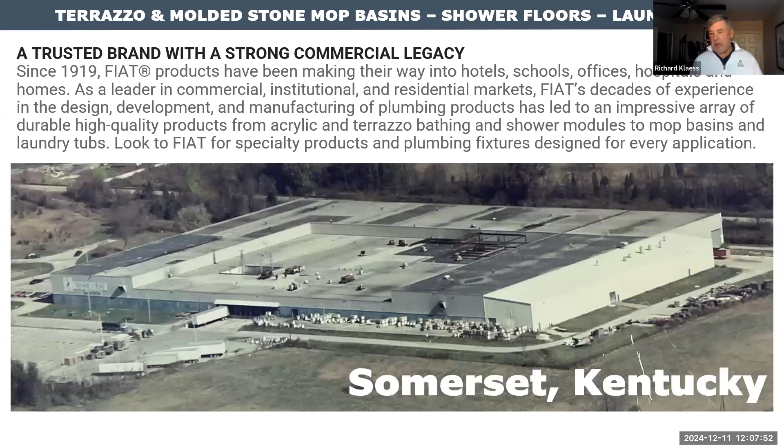Again, FIAT's been in business since 1919. We've made our molded stone product and our terrazzo, and again, being under different ownership, but now being under the auspices of GWBD, we see tremendous potential for the company and growth as time goes on.

The product categories have pretty much remained the same. We make shower floors in what we call molded stone, in terrazzo and in fiberglass. We have a full lineup of laundry tubs that may have more of a residential application, but we're seeing more of a commercial application as well. The dog wash station and our mop basins are also made in molded stone and terrazzo.

You'll hear over time we call our shower floors or mop basins molded stone, but really it's an SMC material. Why is SMC called molded stone? Well, really it's a play on words. FIAT came out with a new resin-filled product in the late 70s, early 80s to take the place of terrazzo. So really it's just a play on words. But what it is, is SMC material, sheet molding compound. Sheet molding compound is basically calcium-based resins that are wetted together and then combined with long strands of fiberglass.

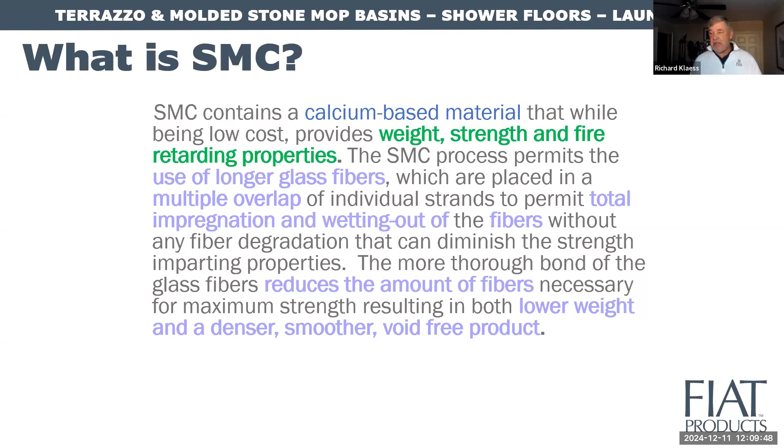FIAT has been making and using SMC material since the early 90s on all of our product. FIAT used to use BMC material. BMC is called bulk molding compound, and that was more of a nylon-filled product with the resins. By going to the fiberglass, we were able to make a lighter product using less material, but the fiberglass strands created a much stronger material. In fact, when we converted from BMC to SMC, our defect rate went from 7% to 0.5%. So it was a tremendous improvement in the product category when we went to the SMC.

The SMC material is used in different practices. It's used by the automotive industry. Some of the non-metal parts on a car are actually SMC material. They're used in frames for tanks. The turrets of the tanks use SMC frames before they put the metal finishes on top. And for those of you who played a lot of basketball outside, those Huffy backboards are all made of SMC material. So there's a lot of use for that material.

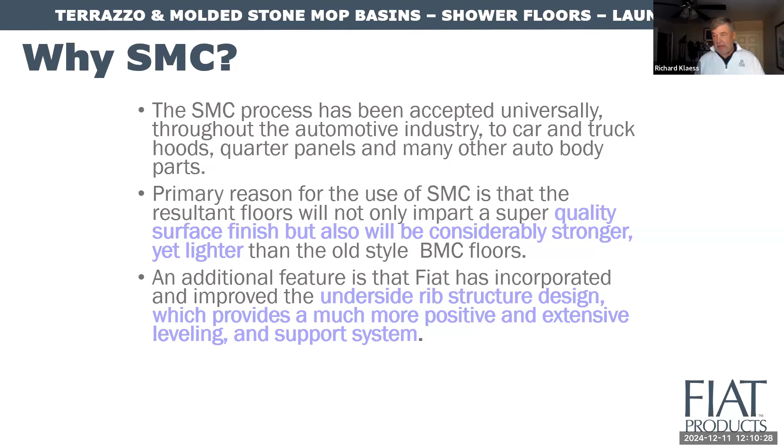And then all the product is inspected, assembled, and packed at our plant in Somerset, Kentucky.

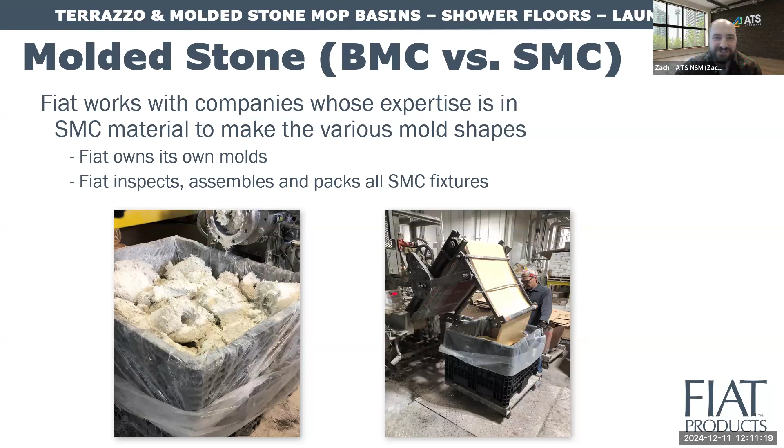Want to go into the shower floor business, the shower floor product line. A couple of the features of the FIAT shower floors: we have a 1-inch tiling flange used throughout the shower floors. All of our shower floors have an integral drain, which is actually molded into the floor itself. So it is all part of the floor.

It actually diminishes the potential for any leaking that you used to have with drains that were field installed or swedged in at the plant. We've added extra ribbing to the bottom of the floors, and I'll go into that in a little bit. We have a drain lip that prevents any leaking of water at the threshold. The water is actually transferred into the finished floor itself, as opposed to going out onto the tile floor outside. And we also have a slip resistance that, in my opinion, is the best slip resistance in the industry.

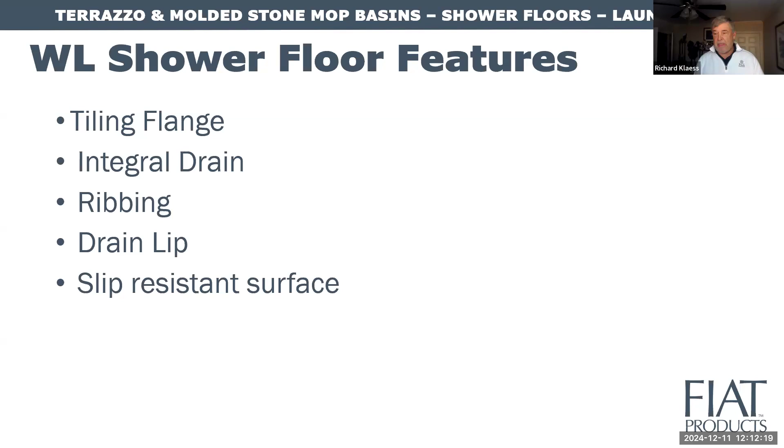Our shower floors meet IAPMO code, CSA, and for those of you in New England, we are all Mass code approved as well. Basically, when it comes to the product category itself, these are the codes that we need to meet when used in its application.

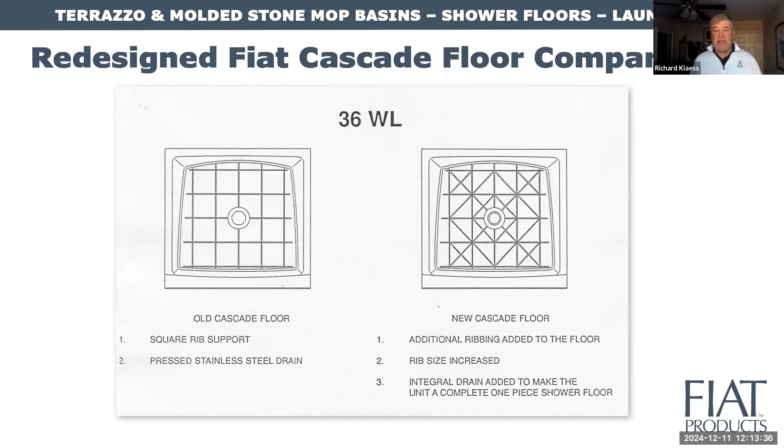In fact, when you're using our WL shower floors, our SMC floors, you do not need to set it in a bed of mortar. It can actually sit on a finished floor or a subfloor. Some installers like to use felt paper, felt padding, maybe to decrease some of the rubbing that may be on there, but you do not need to set our floors in any type of mortar.

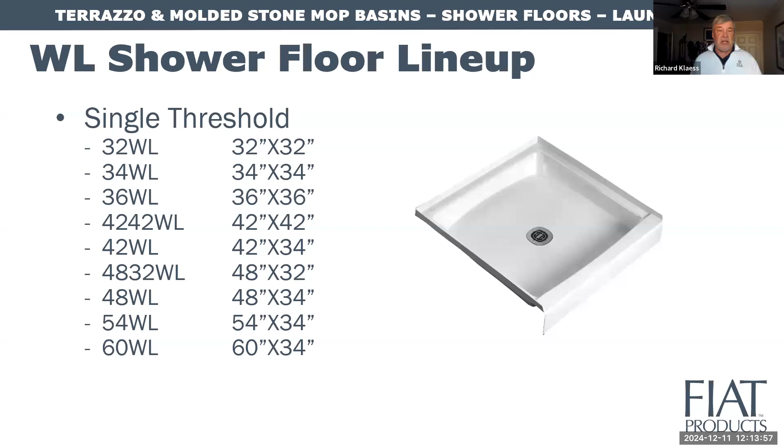The floors come in many sizes, and we can provide this to you later on, but anything from a 32 by 32 to a 60 by 34. And we are seeing more and more of these shower floors being used in hospitality applications. More and more hotels are going to an SMC floor instead of using a traditional bathtub, so we are seeing an uptick in business at the hospitality end. We also offer these in double threshold and neo-angle sizes.

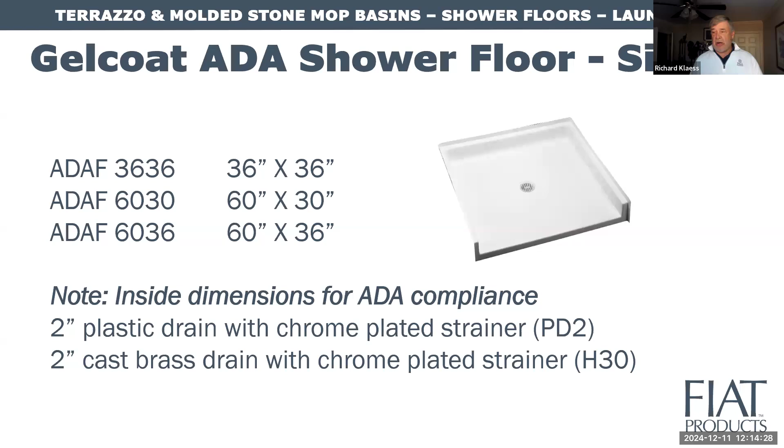And that pretty much covers the SMC side, but FIAT also offers a gel coat ADA shower floor in 3 different sizes. They are a gel coat fiber with a fiberglass reinforcement. We do use a 2-inch plastic drain, or we can provide a cast brass drain. These floors are set up where they will sit next to a finished floor, so you have a clear or seamless wheelchair transfer from the finished floor to the shower floor. So FIAT does offer these 3 sizes in a gel coat. It is not SMC, but it is a fairly popular item in some lower end ADA applications.

Just a quick view. Again, this is just a drawing that shows how it's installed, and it sits next to a finished floor, so you have a seamless transfer.

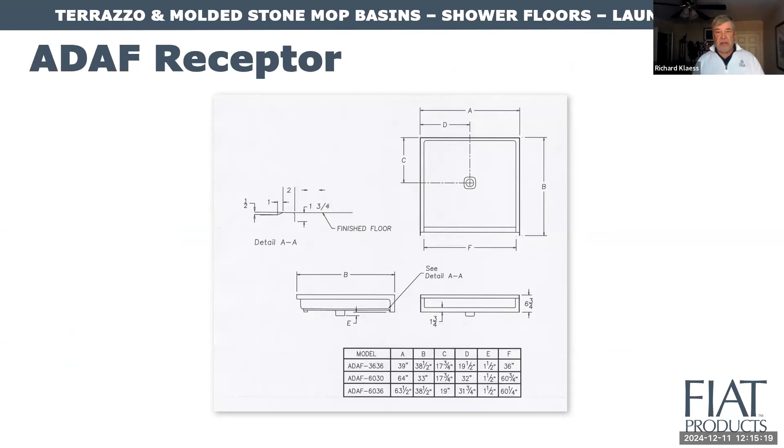So when you look at the FIAT shower floor lineup, we offer it in molded stone, fiberglass, and terrazzo. And we'll get into the terrazzo portion of it shortly.

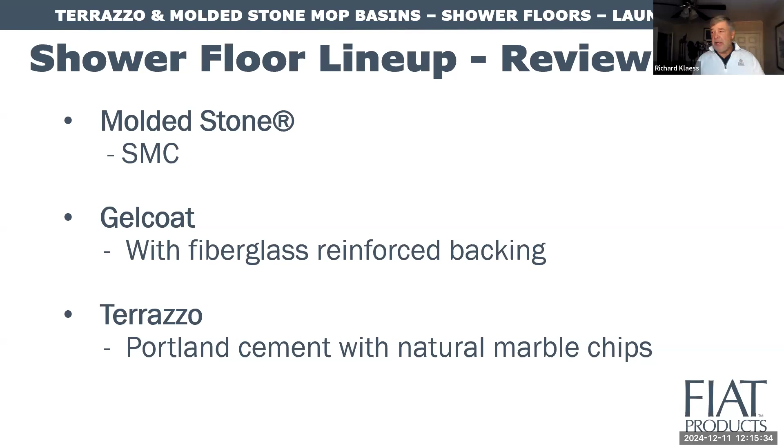Leaving shower floors and going into laundry tubs, FIAT has a complete lineup of laundry tubs using 3 different materials, offering it in single bowl, double bowl, and a drop-in option. Again, we are seeing more and more of these being used. Multifamily, they're putting it in laundry rooms. We're seeing it in small commercial applications, garages, commercial garages, they're using laundry tubs.

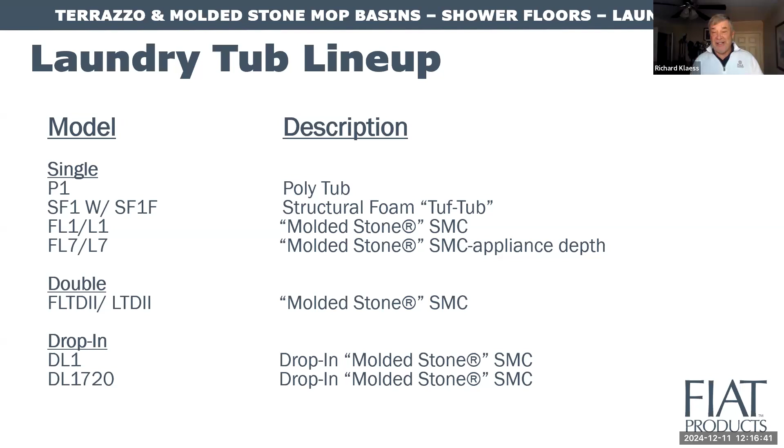So FIAT offers a good, better, best when it comes to laundry tubs. This is our lower end poly tub. It is offered in a single bowl, floor mounted only. It's what we call appliance depth, it's 20 by 24. All that means is it has the same depth as a traditional washer and dryer, so when you put that laundry tub next to the washer and dryer, you have a seamless line across. They come with white metal legs.

And we use the term SAS every once in a while. That's an old FIAT term, it's called Serve a Sink. It was just an acronym we used to talk about our laundry tubs, so they were Serve a Sink laundry tubs. So we still use that acronym every so often.

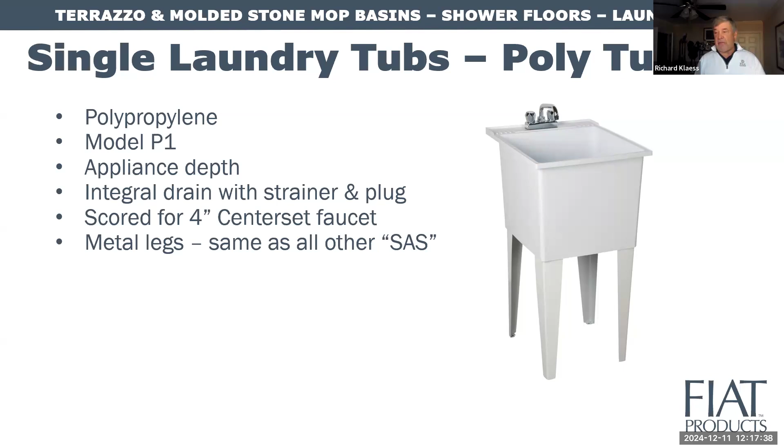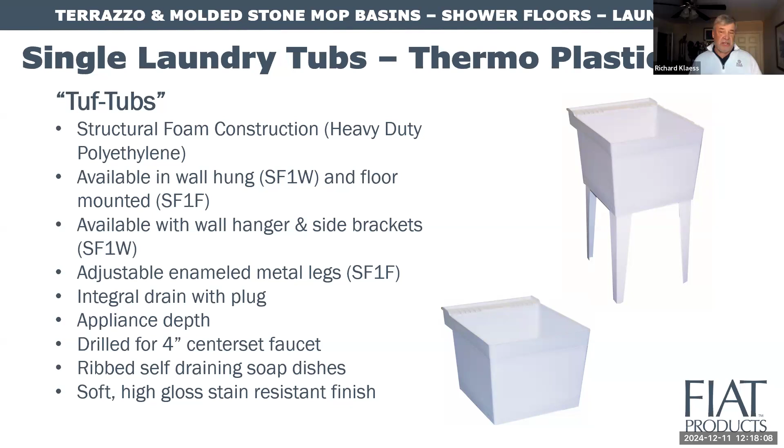Our when you talk about good, better, best, this is our better. This is our structural foam, a heavier duty poly that's offered in both floor mounted and wall mounted units. Again, white metal legs. All of our laundry tubs are semi-drilled underneath the soap ledge. That allows the plumber to offer either 4-inch or 8-inch center sets in some applications. So it's semi-punched underneath, and the plumber can just drill the hole for whatever application they need. Again, this unit is 20 by 24, and it is appliance depth as well.

And this is our bread and butter unit, our FL1. Fiat's been selling this model for over 40 years. This is a little different. It's 23 by 21, and it actually comes with a separate drain and plug. But again, this was what we created 40 years ago.

It is an SMC material. So our good is poly, our better is structural foam, and our best is SMC. We offer 2 different types of laundry tubs in SMC. This unit here, our FL1, also comes with metal legs. All of our leg kits come with levelers, because we know that not every application has a level floor. So the levelers even out the legs, so you don't get a wobbly laundry tub going forward.

The other SMC laundry tub we have is a 24 by 20. Again, it's offered floor mounted and wall hung. This unit does come with an integral drain. It does have metal legs with the levelers and can be drilled for 4-inch or 8-inch center sets. So we literally, in our best category, offer 2 different sizes in the SMC material.

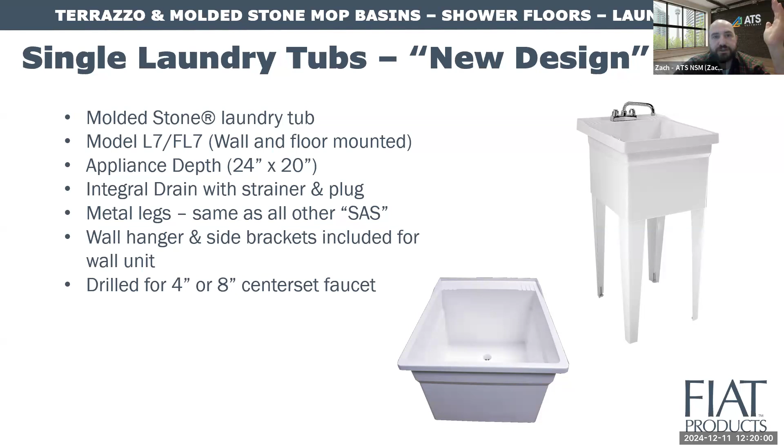I'm sure this has come up for you guys, maybe more in the mop sink section. But we've had a lot more requests lately for the odd wall-mounted utility sink or mop sink. Would this best design be acceptable with the wall mount? It's very similar material, is it not? Yes, this is the same material as our mop basins.

The laundry tub itself in our better and best categories is offered in wall mounted. Basically, it's the same laundry tub, but it comes with different kits. It comes with a floor mounting kit or a wall kit. The wall kit includes the brackets and spacers, so it covers the gap between the laundry tub and the finished wall. So you have a clean finish from top to bottom between the tub and the wall itself. There's no gap in between.

We offer our double laundry tub the same way. It's appliance depth. It can be offered in both floor mounted and wall hung. We also have a drain assembly, so it connects both bowls within the laundry tub to each other. Obviously, it doesn't come with a separate connection to the P-trap, but the drain itself is included to connect both bowls.

Just as a side note, Fiat does offer all their single laundry tubs in what we call a to-go, which includes a faucet, a P-trap, and connectors to the faucet. So if there's ever an application where you just want a laundry tub to go, we do offer that as well.

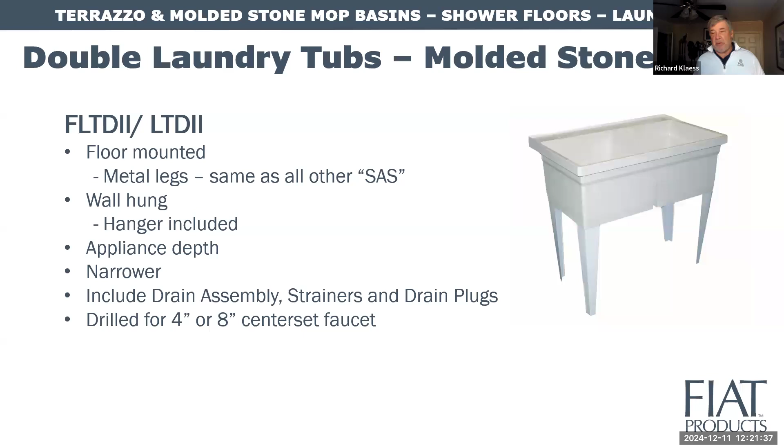And then we have 2 separate types of laundry tubs. We have a standard drop-in of 24 by 22 and what we call a hobby sink at 17 by 20. They are both offered in SMC material. We're seeing in some cases in multifamily where they have a laundry room with a set of cabinets with a counter, and they put the drop-in laundry tub in that counter area.

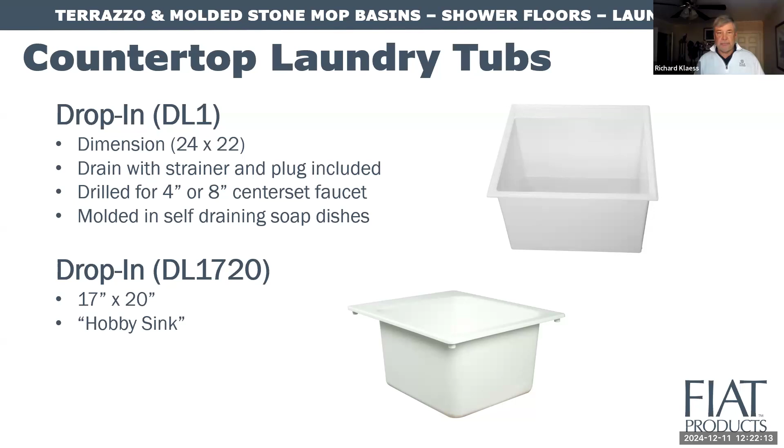And again, laundry tubs meet the standard IAPMO, CSA, and Mass Code approval codes.

As Zach mentioned earlier, we have our Pooch and Boots scrub tub, our pet wash station, and I know we had a presentation on this before, but just a little side note, as I'm spending more time out in the field, I'm hearing more and more how specifications for multifamily are including these in the application. In a lot of cases, what we see is a standard engineering spec calling for WC1 for the toilet or L1 for the lav. At the bottom of the spec, it calls for a dog wash station, and the architect or designer is literally leaving it up to the imagination of the installer to create one of these.

So we took really the best of several of our companies to create this dog wash station. The picture on the right is our current dog wash station, but I actually found this in our archives—this is a picture from 1972 where Fiat was actually trying to promote our mop basins as a dog wash station. And yeah, I'm old, but that is not me in the picture. That's fantastic, I love that.

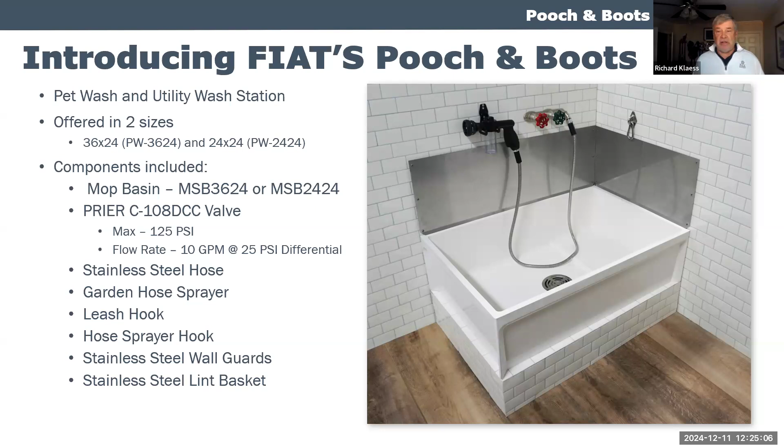We offer this in 2 different sizes, 36 by 24 and 24 by 24. We also offer it less valve because in some cases they want a different looking valve, maybe a pressure balance valve in matte black or a sprayer in polished nickel. That's not our game, we would leave it to you to find someone else to provide that. But I would say 90% of the application is going to be using our PRIER C-108 valve.

And again, just another picture showing a smaller unit.

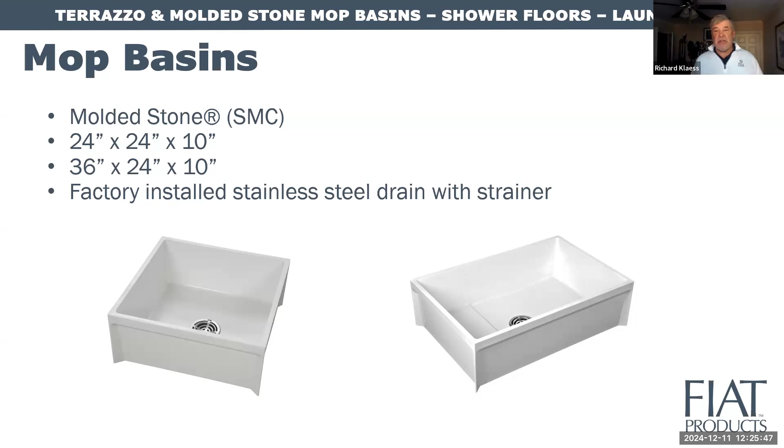Mop basins are, from an engineering and commercial standpoint, the real core product line for FIAT. FIAT's mop basins, we offer 2 different sizes with a stainless steel drain, 24 by 24 and 36 by 24. The factory installed stainless steel drain is actually swedged in at the factory, so there's no installation concerns in the field.

We also offer a unit with an integral drain. It's actually molded into the mop basin itself, so there's no worry about installation. It does come with the gasket and the strainer plate. One of the things I wanted to cover here today is where's the best time to use either the mop basin with the integral drain or the mop basin with the stainless drain.

FIAT came out with the integral drain about 20 years ago, and it's probably now 90% of our business. It's a lighter unit using SMC, and it can be used for most commercial applications. Where we still see the stainless steel drain is in some of the bigger cities. I lived in Chicago and worked there for 25 years, and they still use lead and oakum in the city. So lead and oakum is pretty much what you want to use with a stainless steel drain.

I took someone through a wholesaler's warehouse and they saw a whole pallet of lead ingots and asked what's that? I said, this is what they use. Some other cities, New York, Philadelphia, San Francisco, in some applications still use it, still would like the heavy drain or the stainless drain. So we offer both. It's all a matter of application, but 90% of our business has gone to the integral drain.

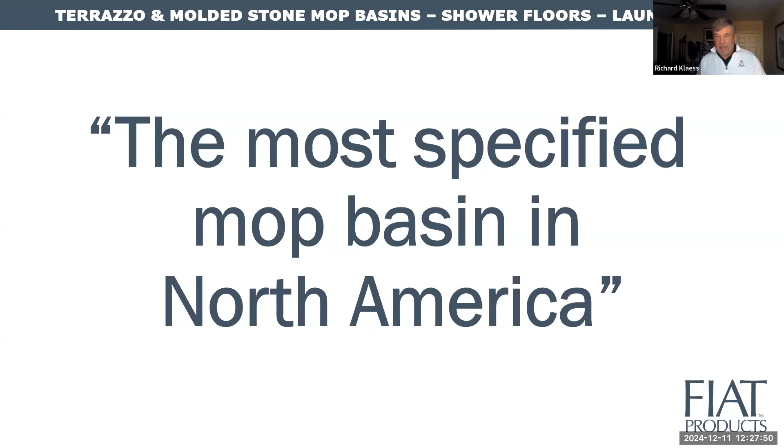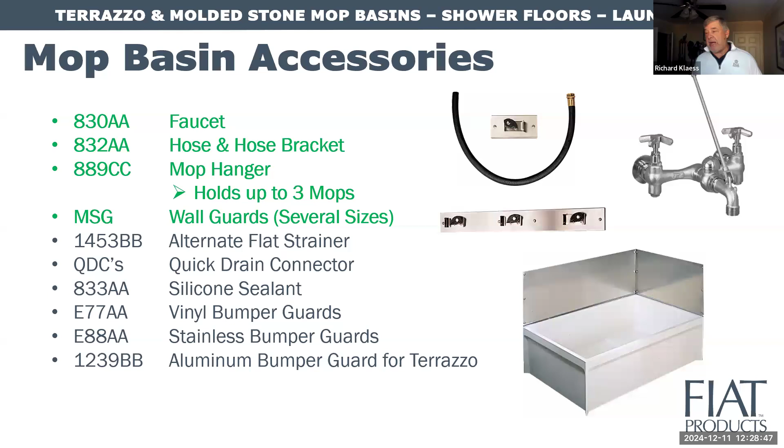The wall guards, I would say maybe 75% of specifications call for wall guards, but I still, when I talk to our sales teams, make sure that they include it as part of the everyday spec. We also offer a lot of other accessories, but between the mop basin and these four items, these are parts of the primary specification to look at.

Now, this is where I'm going to have a question. It comes up a lot internally, actually. We're often asked to put together a product selection, and we may just have an application, either a school or hospitality, office, for the bumper guards. Where should you use a vinyl bumper guard versus stainless? What are the benefits? Is there a true differentiation, or doesn't it need a bumper guard, or is that too much of an upsell? It depends if you've got a heavier application.

Bumper guards are always good to add. They're not always necessary, but they do add added protection to the sides of the mop basin. Vinyl versus stainless steel, there really isn't much of a difference. I guess it has to do with the building itself, how heavy-handed are the people using that mop room, are they just slamming buckets? In some cases now, a lot of companies are using plastic or composite mop buckets, so they're really not going to cause any damage to the side of the mop basin itself. It's really just added protection.

Hopefully that answers the question, Zach. Yeah, perfect. Thank you.

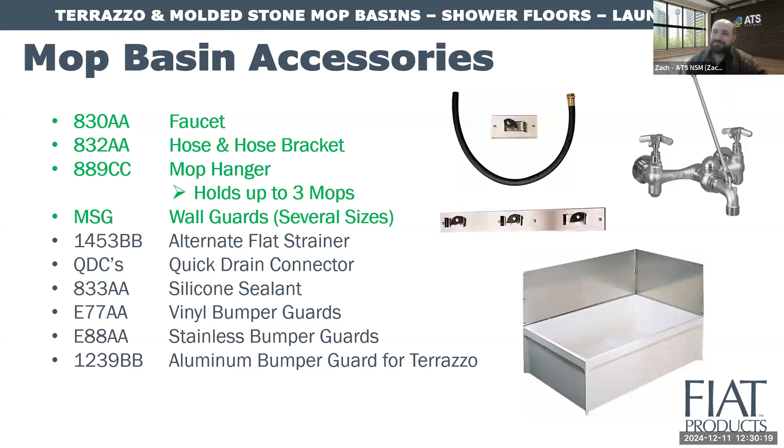Again, our mop basins meet all the required codes: IAPMO, ANSI, ASSME, CSA, and Mass Code.

One thing I heard going back to the dog wash station: at the ASPE convention this year, a lot of engineers were talking about having it in their multifamily specs, but now a lot of engineers are doing pet stores or pet hospitals and adding these pet wash stations to their specifications when building them. So there is a huge market we are just tapping into with the dog wash station.

Then there's terrazzo. Terrazzo is still and continues to be a very important part of our lineup. It's kind of funny - I've been in this business quite some time, and every year somebody says terrazzo is a dying business, and every year our terrazzo business increases.

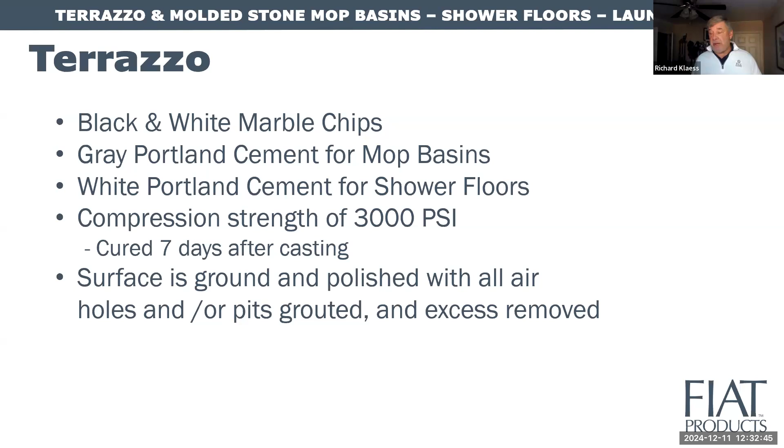The surface is then ground and polished, with air holes and pits grouted, and all excess cement removed. The terrazzo has a smooth surface of about 70% marble and about 30% Portland cement.

For sealing, we recommend that our terrazzo product be sealed at the job site. There's some contention as to whether terrazzo should be sealed at the plant or at the job site. We feel it should be done at the job site towards the end of the job, mainly because if it's sealed prior to going to the job, you get a lot of contamination and construction dirt in that sealant, and it needs to be stripped and resealed again. So we ask, and we even have it in our instructions, that you wait until the product is installed, towards the end of the job, and then seal it.

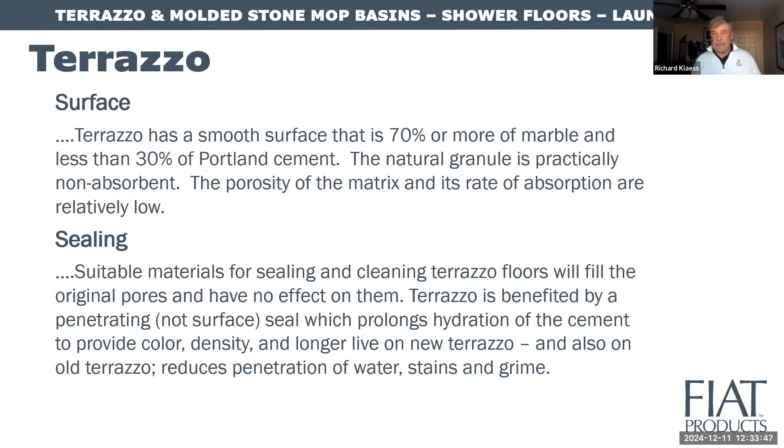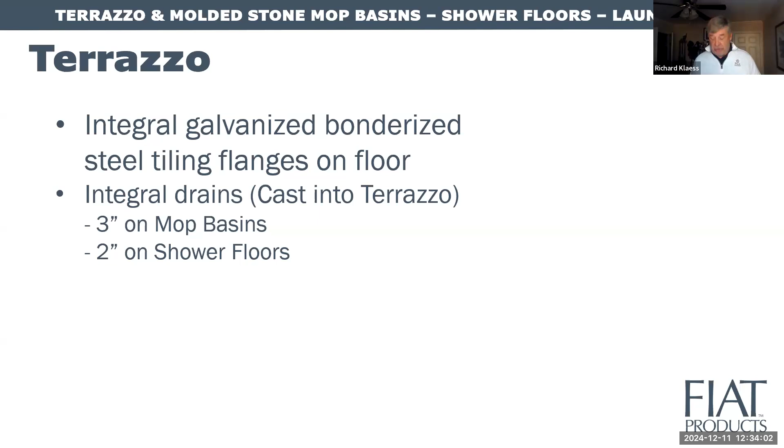Our terrazzo comes with integral tiling flanges - actually this needs to be changed, they all come now with stainless steel tiling flanges - and we have integral drains cast into the terrazzo, 3-inch on mop basins, 2-inch on shower floors. Again, they meet all appropriate codes.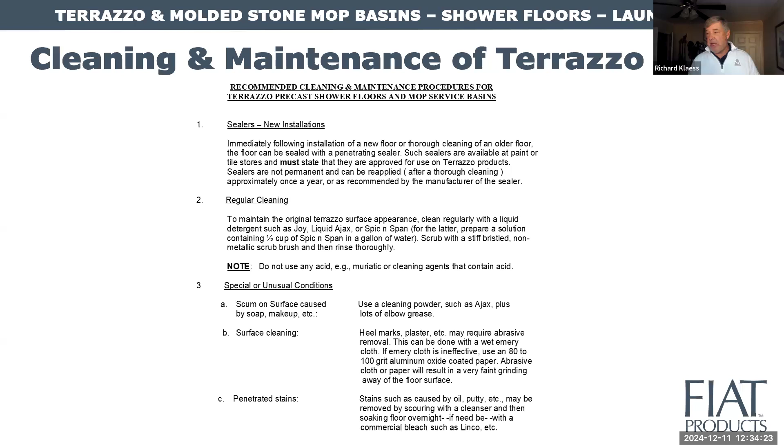We don't need to get into this too much, but we do include installation instructions and talk about sealing. We also include how to clean and maintain all terrazzo, and again we talk about sealing.

Then there's the terrazzo lineup. There are many, many different sizes of terrazzo. Some people ask why we have so many different sizes of terrazzo versus not as many sizes in molded stone or SMC. An SMC mold can cost anywhere between $250,000 and $300,000.

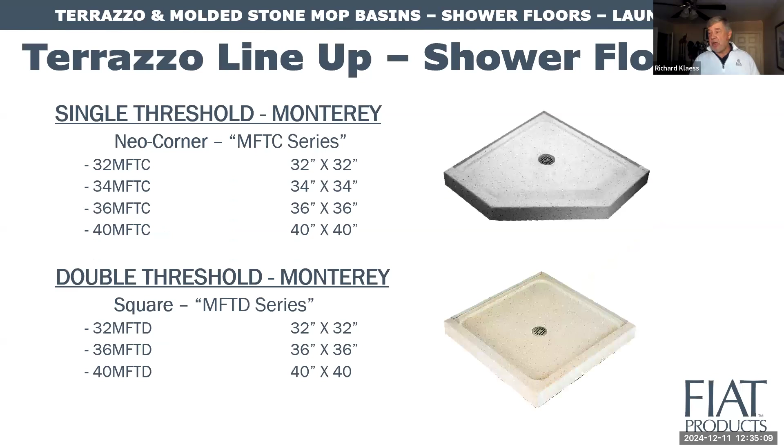A terrazzo mold costs considerably less, to the point where we can make a mold to produce one floor for a custom job, and we'll get into that in a bit. We have many sizes in square, even more in rectangular sizes. We offer them in neo corner, double threshold, and we have a full lineup of ADA floors as well. We actually offer two different types of ADA floors: one with no threshold, similar to the FIAT or the fiberglass unit I mentioned earlier, where it sits and butts up to the finished floor, giving you a seamless transition from the finished floor to the shower floor.

Also, we offer it with a ramp in all 3 sizes, and they all have a thinner shoulder with a 1-inch tiling flange. FIAT also offers what we call barrier-free with ramp that are non-ADA compliant. These are actually floors that FIAT had in the lineup before the ADA laws came into compliance, back in I think 1992 or 1993.

We find that there are many jobs that don't have to comply with ADA. It could be a residential unit or apartment. In Chicago, for instance, they still use a lot of terrazzo in their high rises that don't need ADA compliance. So we do offer different wheelchair accessible or barrier-free with ramp options.

One thing to keep in mind when it comes to ADA floors, we get a lot of requests: can you put a shower door on it? Can you put some type of barrier on it? It's very difficult to do, especially on one that has a wheelchair ramp. So we always recommend, and we put this in our specifications and installation instructions, that you install a floor drain outside the shower floor, because it's just the nature of the beast. Water is going to come out of that shower floor.

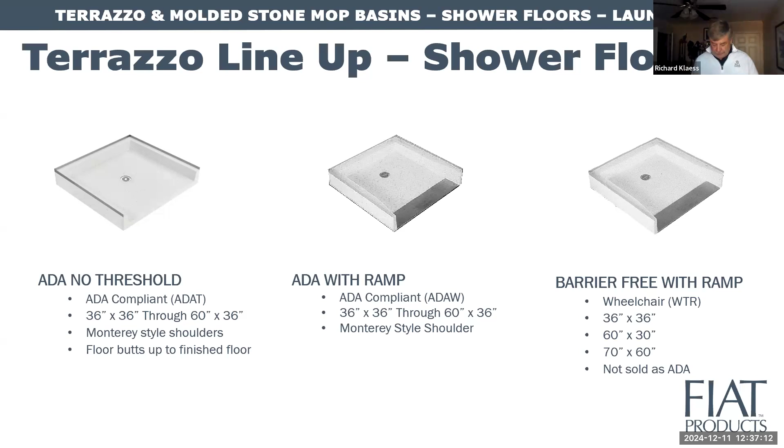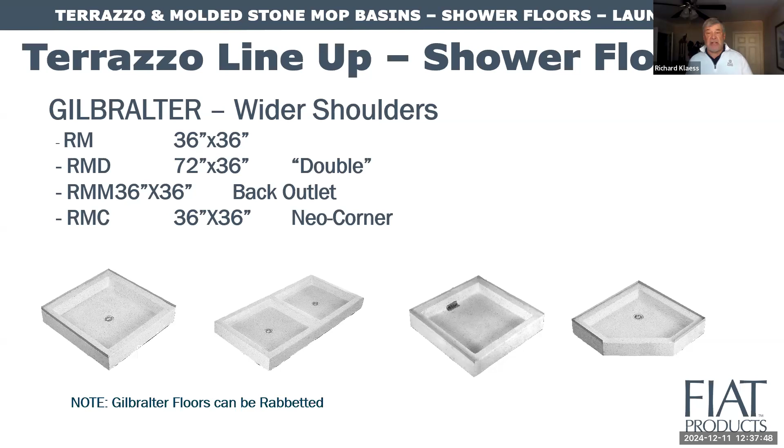We recommend that a floor drain be installed outside the floor itself. Again, we actually offer some units that have flanges on all 4 sides in case they want to put panels on the threshold side. We also offer different types of units with wider shoulders, with drains in different locations, and with rabbets - slots inside the wall so you can insert maybe a toilet partition wall into that slot. So we do offer that as well.

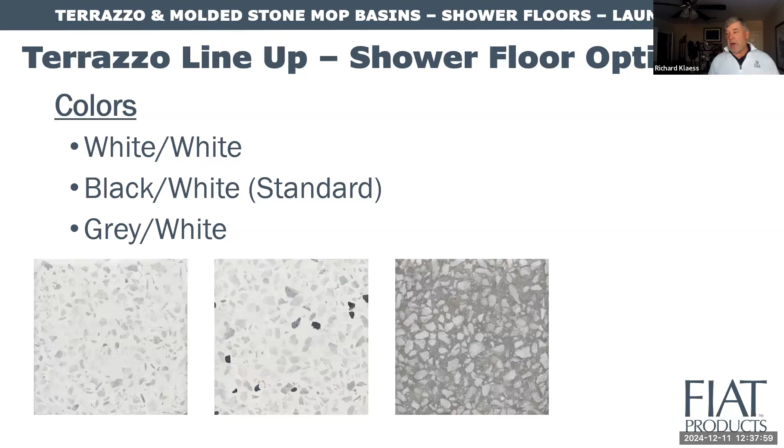Our standard lineup on shower floors is black and white. We also can offer white on white chips and gray and white chips. And we can offer different types of drains - back outlet, side outlet. We can offer vandal-proof drains. If somebody's specifying a psychiatric hospital, we can provide vandal-proof drains for that application. So those are available as well.

And as I stated, we can do custom orders - custom sizes, drain location, shapes, rabbets, flanges, drain location, we can do all that. We provide a custom sheet to fill in all the dimensions, special colors, and send it to FIAT. FIAT will then work up a job quote, and then you put the package together. So we can do all types of custom as well.

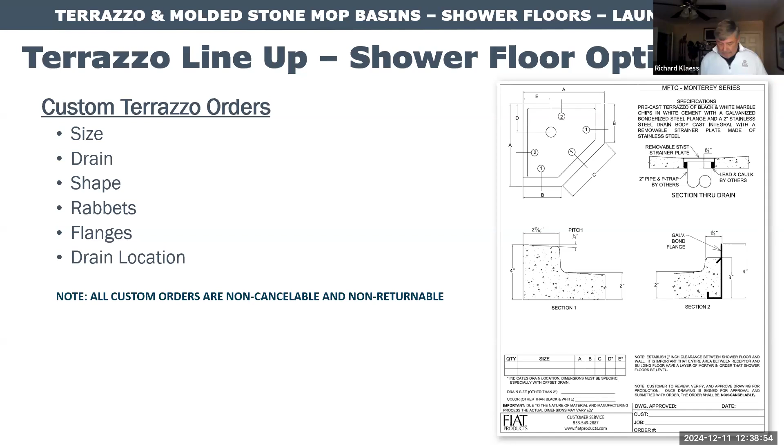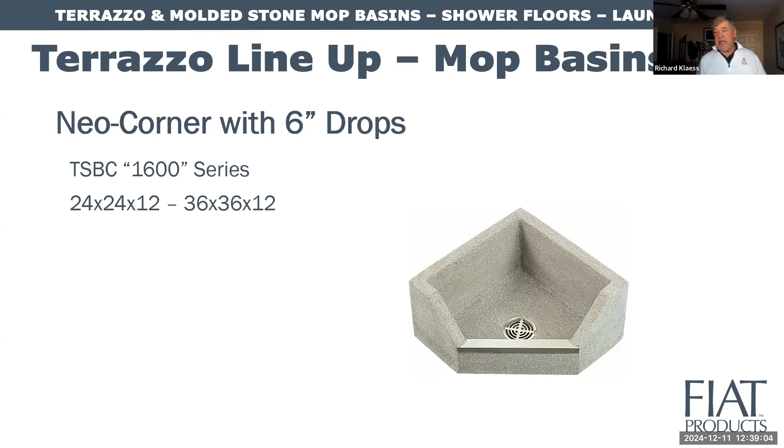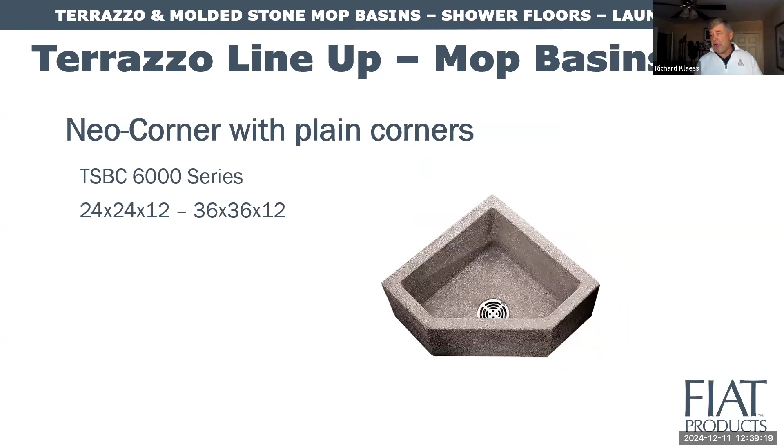Full lineup of mop basins. Again, there's a whole lineup of mop basins. We've got Neo Corner with drop fronts, Square with drop fronts, and all of these come with or without caps, stainless steel caps. You can order them with just a cap in the drop front in the threshold. We've got Neo Corner with 12-inch height shoulders all the way around with caps.

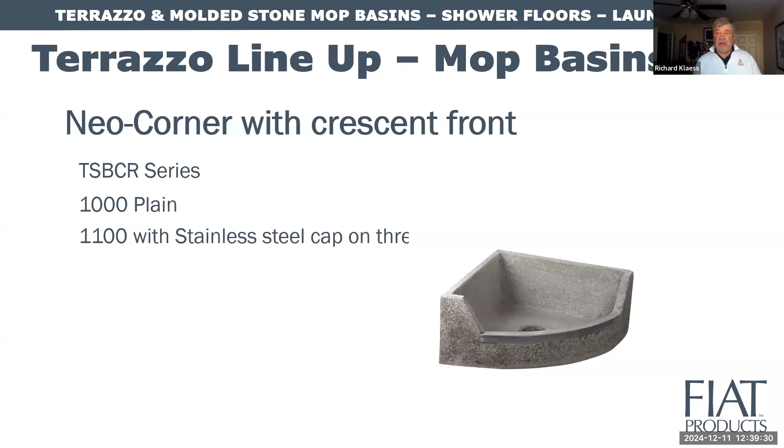A Neo Corner with a crescent front, 6-inch high curbs. And then our standard TSB 100, which is probably our number 1 item, and the TSB 200, which is our number 2 item. The only difference is the 100 has the caps, and the 200 does not have the caps.

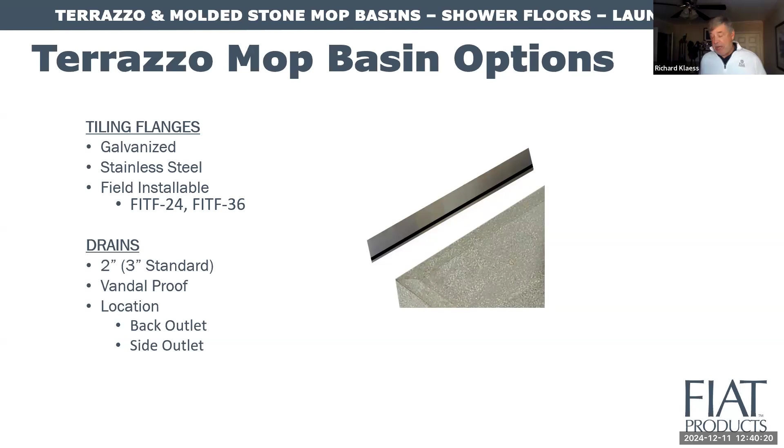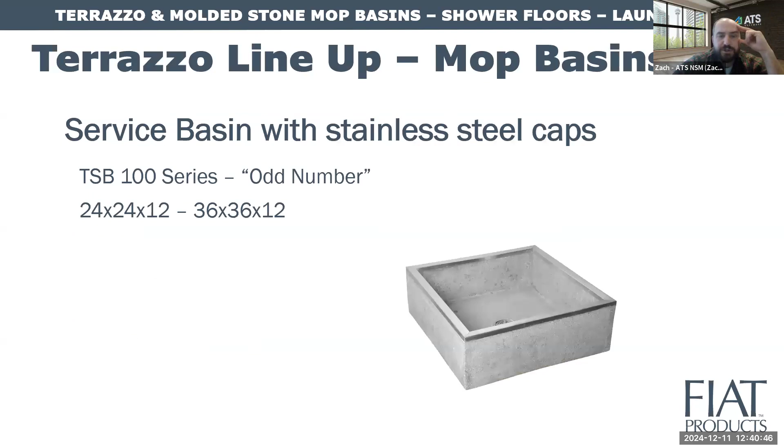So when you look at our... Just a quick question there on the customization, because this has come up a number of times - you showed that shower with the drain kind of on the corner, similar to a scupper, where it's just like a quick 90 out, I would assume. I was wondering whether that's a possibility for these custom mop sinks as well. The one in this picture here? Yeah, correct. Oh yes, because that is the one that, quite often when we're looking for custom mop sinks, it's usually because they don't have the ability to have a core penetration for the drain straight below, so they want a 90 out. I think that's something you guys have done as well, right? Like a quick 90 on the drain. So you're talking about the drain body coming out through the shoulder as opposed through the floor. Yeah, like the back wall. In all my years, I don't know if I've ever had it done in my area, but I don't see why we can't do it. It would probably have to be about a 2-inch drain.

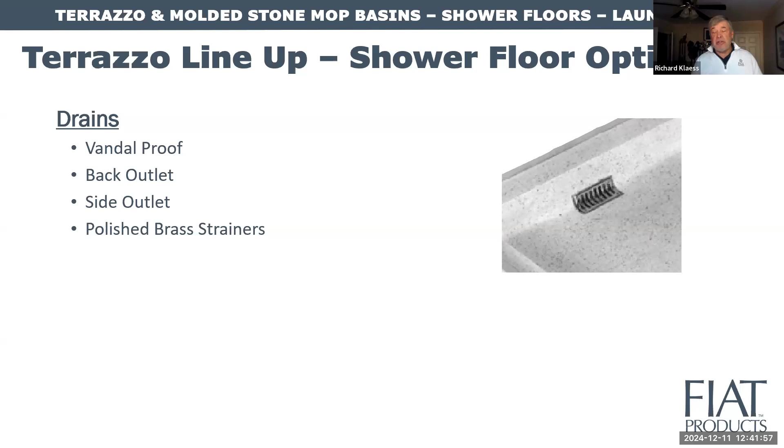I'm not sure if the 3-inch pipe would fit through there, but that's something we would have to look at on a needed basis. And again, what also would hinder it would be the tiling flange, because the tiling flange itself is actually installed and integral to the floor, to the drain or the mop basin itself.

Of course, now that I think about it, when you're looking at a 12-inch wall, I don't see why we wouldn't be able to do it. But again, I'd have to talk to our engineers. It would be tough on a 6-inch, but on a 12-inch, it might be possible.

And then one of the other questions that always comes up, and I think you show it on that custom spec sheet, is whether or not there's any minimum distance from the center line of the drain to the wall. Because that's always a question from engineers. There's maybe one or a 1 inch, but I've never had anyone get any closer than 2 or 3 inches. But if it butts right against there, may be an issue.

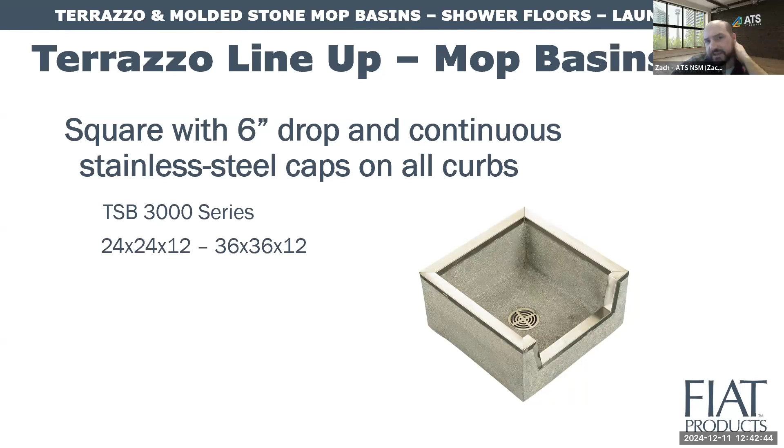Yeah, I think it's a 3-inch standard. But again, we take each one on an as-needed basis. I've never had one rejected because of the drain location. So, again, maybe if it's that tight, you almost have to do something with the finished wall to move it in a little bit.

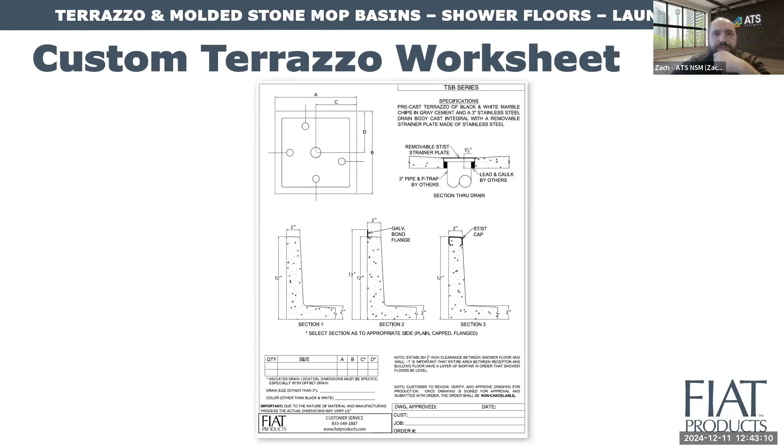So again, terrazzo shower floors, residential, mainly in the big cities. Living in Chicago, they're still using terrazzo shower floors in some high rises. Big in healthcare, universities, we're big in dormitories, and in some penal prison applications. And our mop basins, commercial and institutional.

So that's the FIAT lineup. That's pretty much what's happening with FIAT. I'd like to open it up to any questions that may have appeared.

And we'll pause for a second here. I've asked most of my questions as we go, so I'm not sure if there could have been any additional ones that come in. Couldn't have been that thorough. We'll see, we'll give it a second here. We'll pause and see if any questions come in.

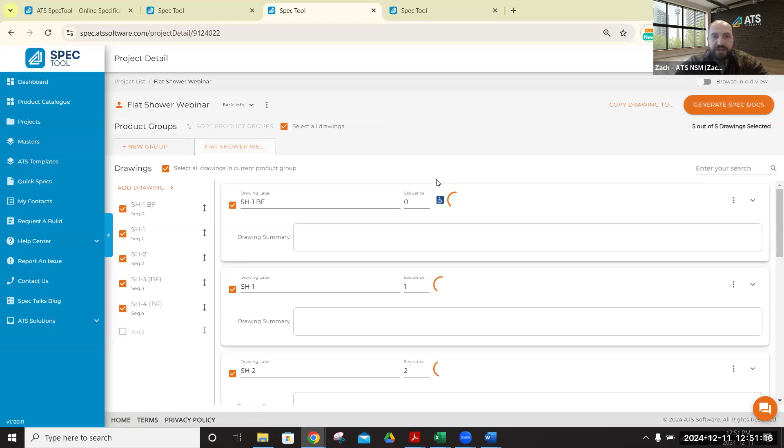That's the main reason that you want to go and utilize the ATS system. Sure, it's pretty fast and easy these days, and gives you nice filters to help you select the right stuff, but mainly you are coming to get the configured model name and number.

Now, as we were getting ready for the session, I put together a quick little selection here, and mainly I want to show you how you can do a really simple, quick selection in just a matter of minutes. So first you can see we've got our Fiat Shower webinar group here. Within a project, you have the ability to have multiple product groups. Similar to what we had before, this would be our empty product group.

So similar information as a quick spec, but this lives within your project. A project has an application selected, has a location selected, and that allows us to start adding our rule engine, which is going to recommend product based on the application and the location for barrier-free codes.

If I hit the add new product button here, we're again going to come to that category page where we can search for our category. So if I'm searching for sink, or you can search for a series, we could say Pooch and find that Pooch and Boots scrub tub. Or if you know your exact model number, say you're a mop sink heathen and you know it's an MSB 2424 that you like, you could search for the model number and it'll pop up that way.

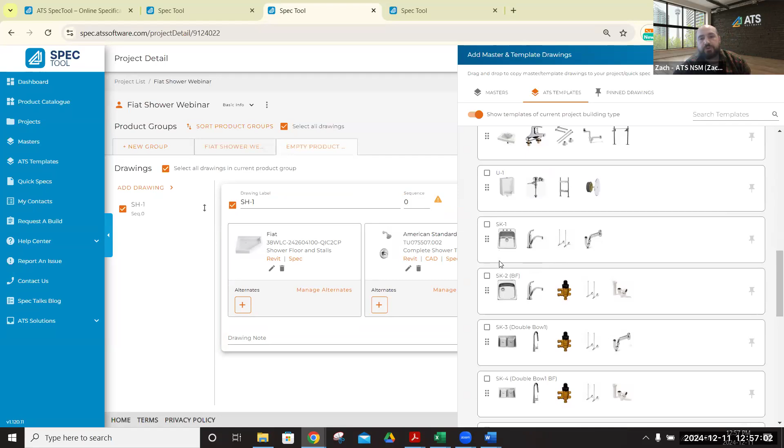We can go and select either individual or groups of fixtures. So if we want to grab all the showers in here, we'll review them to make sure they're all appropriate. We'll just check the boxes, copy the selected drawings, and drop them into the product group. You can drop them above, below, or individually as you go, however you wish. Then if you need to make any changes, you just click in and adjust.

So let's say we wanted to edit this from our Stern Williams to our Fiat, because that's what we've been talking about today. We can do so. We can go find a 36 by 36 Fiat that complies with the category. We could change this to a barrier-free version if we wish. Just toggle the box and select the options that now move this from a general use to a barrier-free. Then once you're done, we'll either add another selection or hit complete.

And then we come to, okay, now how do we get this information from here into our go-to-market strategy? Whether that be your firm uses a written spec in CSI or uses a PDF package, a fixture schedule, written, various types of written specs.

We can download an individual file. We can download just the one product group that we've been working on, or we can download the entire package, all these multiple product groups. So if you had copied your drainage master into this, your backflow, your water heater, all your sinks and toilets, you can have them separated by different product groups and download - maybe you just need to revise the showers and re-download that. Or if you need to download the entire drainage and sinks and everything else, you can do that as well. So you would hit generate documents, and then you would select the ones that you need to download.

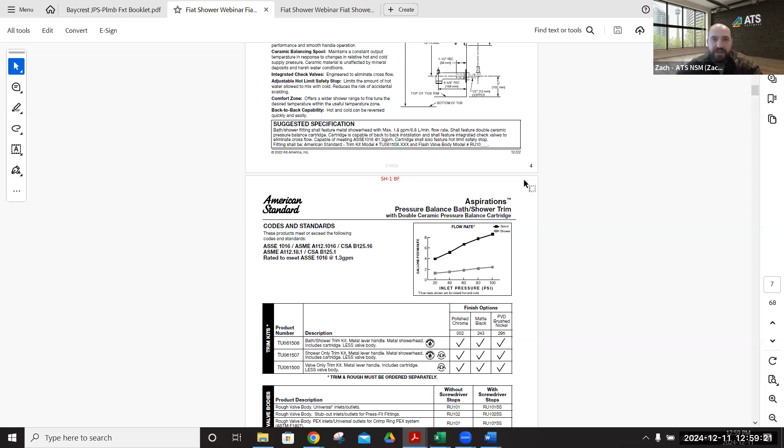Then we have our submittal format, which is the configured product selection that you've gone and made, all the multiple manufacturers on one page. Here's a barrier-free shower, all the components that need to make the shower barrier-free, et cetera, et cetera. We can go into our written spec.

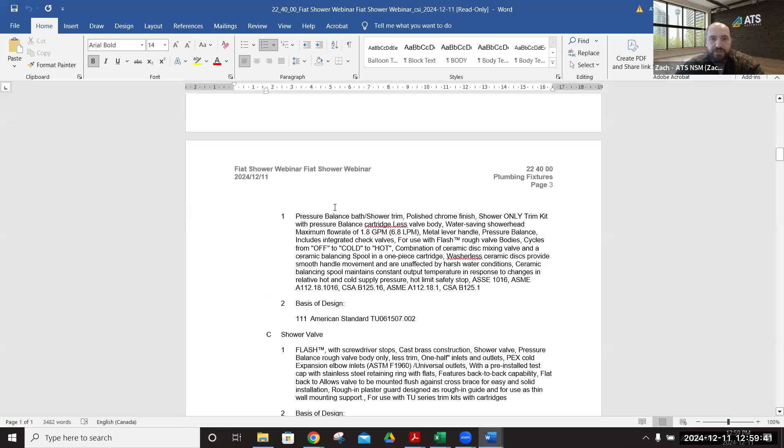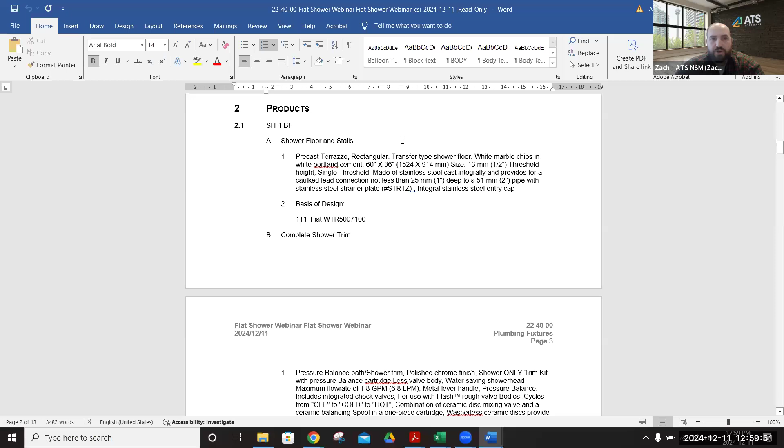This is our CSI format, where you get a 3-part spec. You get your general, your products, and then your execution - your SH1BF. We've got our barrier-free shower selected here, all those different components. You get a nice little basis of design, and then your model number listed after.

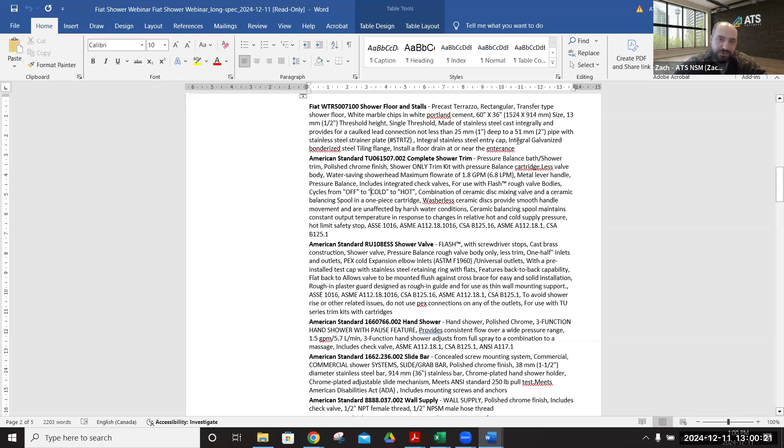That's really the biggest change in format from the long spec that we offer to the CSI. CSI follows that 3-part standard where it's description and then model name and number, whereas our long spec provides you with a model name and number and then description. So really, again, it comes down to how you choose to go to market, what products are available for you.

And here, if you need the Revit file, you could download the Revit for the entire package. If you needed that schedule in Excel, you could use that format. Really, again, it just comes down to what formats your firm writes their specs in. And then you can copy these, put them directly into your package to go to market.